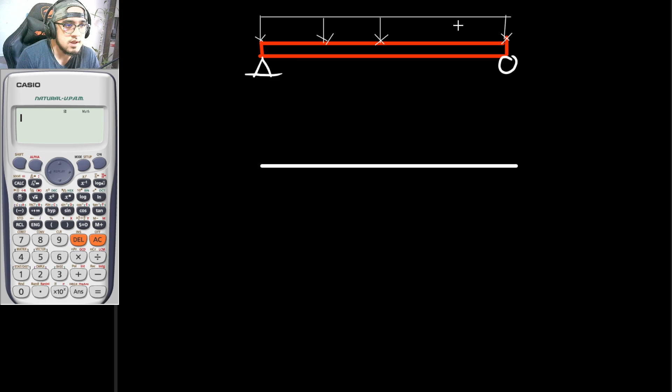So once again, meron tayong moment, and let's say beam nga ulit siya. Let's say we have another beam, simply supported. Let's move this whole thing. So this is your beam, simply supported, and let's say this is to be it. For its shear diagram, dapat i-subject muna natin siya ng load. So let's say this is its load, a uniformly distributed load.

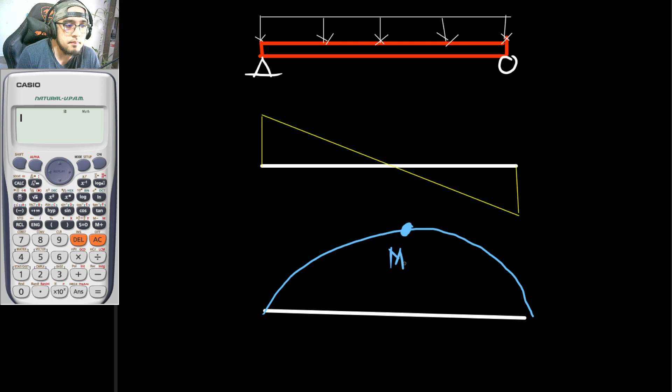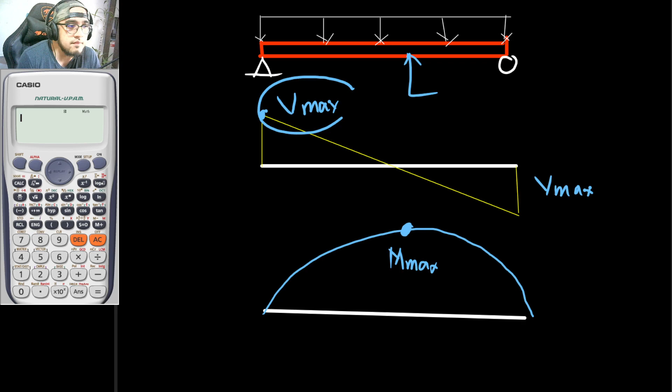And for its shear diagram, it would be looking like this. And for its moment diagram, it would be looking like this, approximately. So meaning, if this is your maximum moment and this is your shear maximum or Vmax, it means your structural member should be stronger than your Vmax and should also be stronger than your Mmax.

So that's the very basic design philosophy common to all our structural engineering subjects, just like Principles of Steel Design, Reinforced Concrete Design, and even Timber Design. So that's really the main idea or the main philosophy.

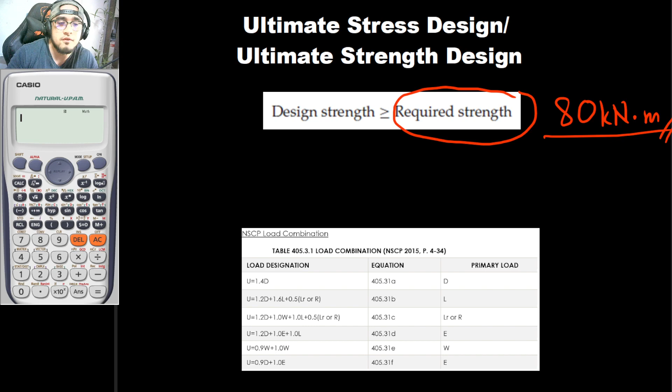Okay, and also, from the previous meeting we discussed the various uncertainties in the design of reinforced concrete, like the uncertainty of the members and the uncertainty of the magnitude of the loads. So for example, we have a required strength. Let's say we anticipated 80 kilonewton meters, but in actuality, sa totoong buhay, naging 84 kilonewton meters yan.

Though it is not that much, it just increased by 4 kilonewton meter. But if you designed your member to withstand just this, it means if this is to be your load, your member will now fail. So that is one uncertainty.

And that is to be the uncertainty in the load. Another uncertainty is that maybe during the construction of your reinforced concrete, there will be imperfections in the construction procedure that will reduce the strength of the members.

So for example, let's say the design strength is 155 kilonewton meters. This is just for your design strength. But when you were constructing it, there were some imperfections in building it, so let's say the actual strength was reduced to 130 kilonewton meter. This is just for pretend. So once again, we would be having various uncertainties.

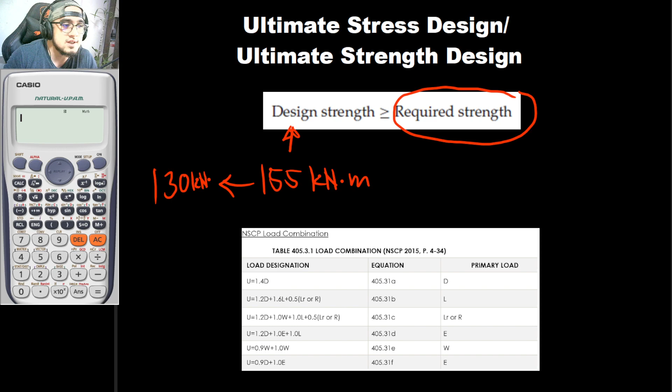And for us to address those uncertainties, we will now be applying factors of safety. We will place our factors of safety to address the issue of uncertainty.

So for your required strength, we will now be applying factors in our load combinations. Once again, our load combination will be as follows. So these are to be our load combination.

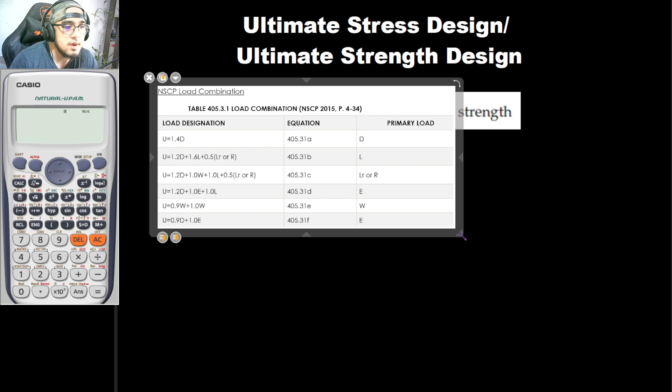Confirmation, everyone. Are these factors readable? 1.4D, can you read it? 1.2D plus 1.6L, can you read it? Are these readable, guys? Yes, sir. Okay, so very good.

So once again, for us to address the issue on the required strength, we will be increasing the loads itself. So if your primary load is to be a dead load, you will be increasing this, so 1.4 dead load. Then if you would be having your wind loads and let's say your earthquake loads, they are to be as follows. And the thing here is that if you have all of these loads, what you will be doing is solving for all of them.

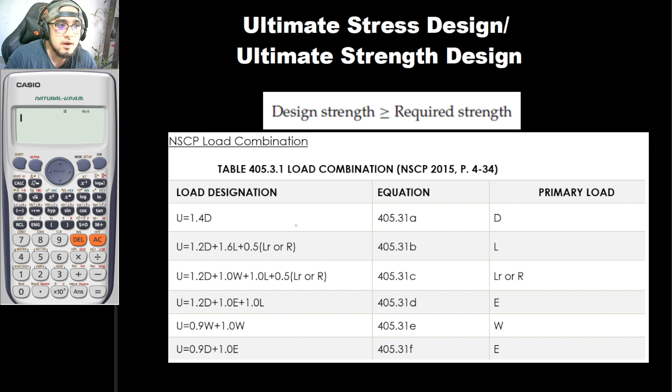So you will be solving for all of them. Then after solving for all of them, you will now be choosing the largest magnitude or the biggest load. And the biggest load is to be the one that is critical. So the biggest load is to be our basis for our design. So that is for our required strength.

So once again, that is to be our way on how we would be addressing the uncertainty of the required strength. But how about for the design strength?

For us to address the design strength, we will be reducing the strength of the material itself. So for example, 150 kilonewton meter is the strength of our structural member. What we will do is reduce it, let's say up until 135 kilonewton meters, so that if this is what we designed, maybe our required strength will slightly exceed this, like 136. If this is what we used, in actuality this will be its actual strength. But we reduce it so that we are safer.

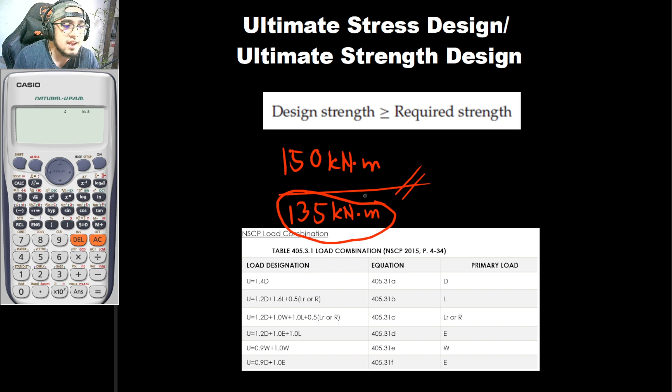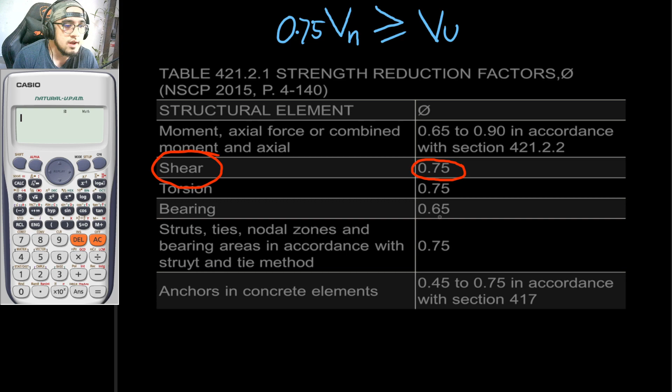So if we are to reduce our design strength, we will now be multiplying it by our reduction factor, given by the symbol phi. Your symbol phi is given by the following: it can either be this one right here if you are designing it in moment or axial force or combined moment and axial, which will range from 0.65 up until 0.9. And if you are designing it in shear, you will be using the reduction factor of 75%, or 0.75, and others.

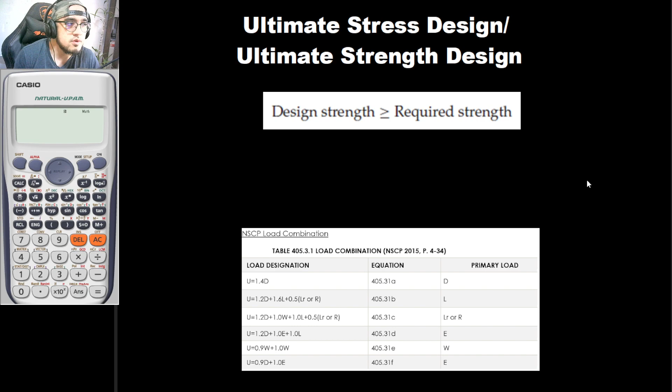So with that, if you are designing a flexural member, when it's moment, your equation will now be equal to phi, the reduction factor, times the nominal strength of your member. When we say nominal, this is the true computed value of the strength of your material. And this should be greater than or equal to whatever load combination you will be computing.

So with that, guys, this is now M sub U, your ultimate moment. So now the question is, for the required strength, how do we know this required strength? That is to be our main concern for today's meeting. So for the magnitude of the required strength, we can solve for this using any method from theory of structures or statics of rigid bodies.

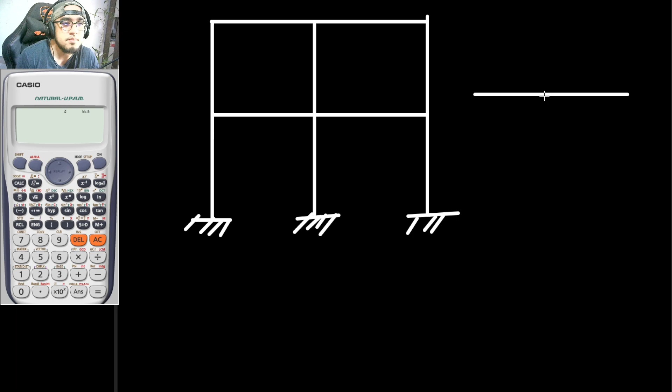For example, let's say we have a certain frame, like this one. Once again, this is just an example. Or let's say we have a certain simply supported beam, or maybe a continuous beam. This one right here could be fixed, then let's say we have a pin support here, and a roller support here, and another roller support here. This is just an example, guys.

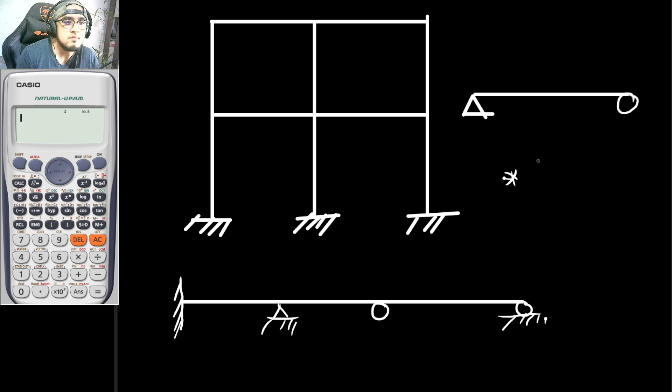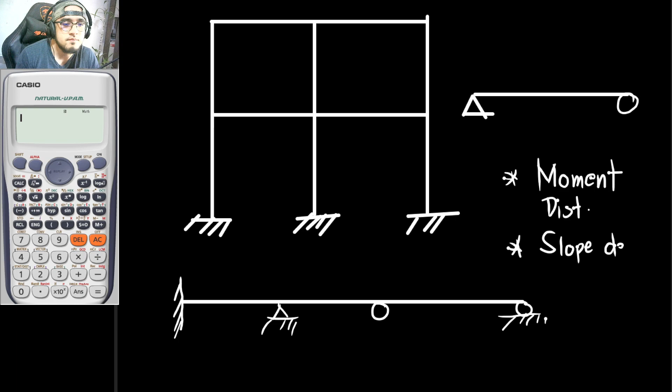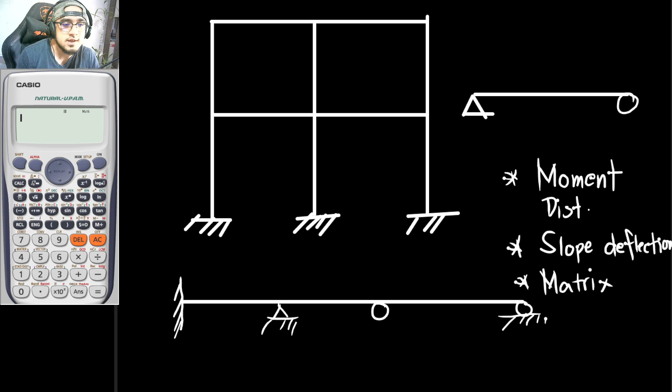So if we have these structures, we can solve for its moment, shear and moment diagram to get its maximum value by using any of the following: moment distribution method, or maybe slope deflection method, or maybe matrices. You should already be familiar with these. They pretty much give the same results.

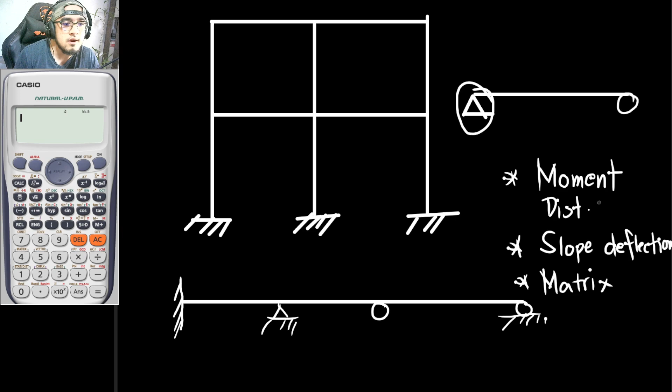For your simply supported beam, since this is determinate, you can solve for its maximum shear and maximum moment using statics of rigid bodies, wherein you would just solve for the reaction then draw its shear moment diagram. If you have an indeterminate structure like your frame, or this continuous beam, you will be using moment distribution, slope deflection, or matrix. It is not limited to these procedures, so if you know other procedures, that's fine too.

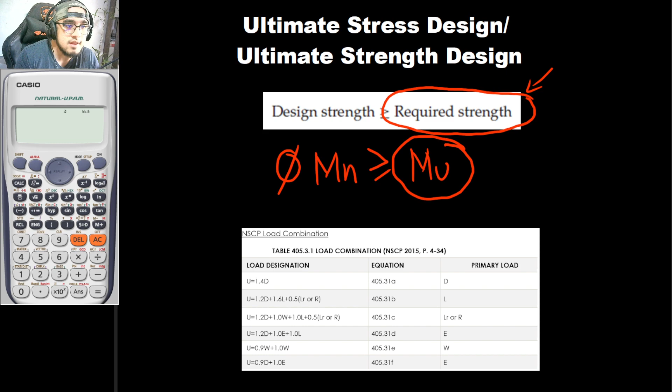So that's where our debate ends. The short answer, in reinforced concrete, is yes, we can solve for the required strength without going through these methods, if certain conditions are satisfied. From NSCP 406.5, we have a simplified method of analysis for non-prestressed continuous beams and one-way slabs. We can actually use this method to determine the required strength if all of these conditions are satisfied. The first condition is that your members should be prismatic.

So what does that mean? These are the conditions. It is said that the members should be prismatic, meaning that for a certain structural member, its cross-section at one end should be the same cross-section throughout. For example, we have a certain beam, and let's say the cross-section at this part is rectangular, let's say 250 by 400, just for example. This section should be constant throughout, so in all sections, it should be 250 by 400. That is what we mean by prismatic.

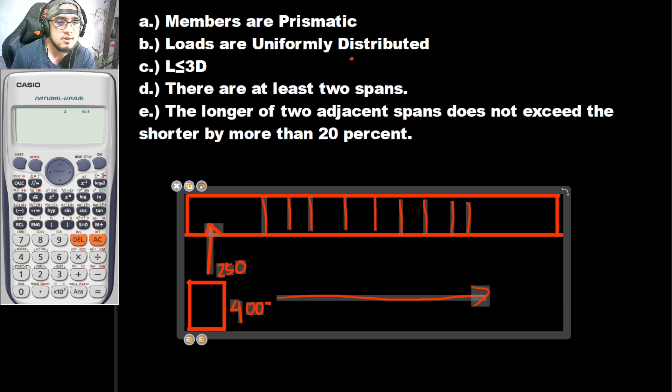And if your structure would look like this, for example, this is again your beam. We have a section here and it increases, so it gets a bit bigger. Let's say that at this part, the section is again 250 by 400.

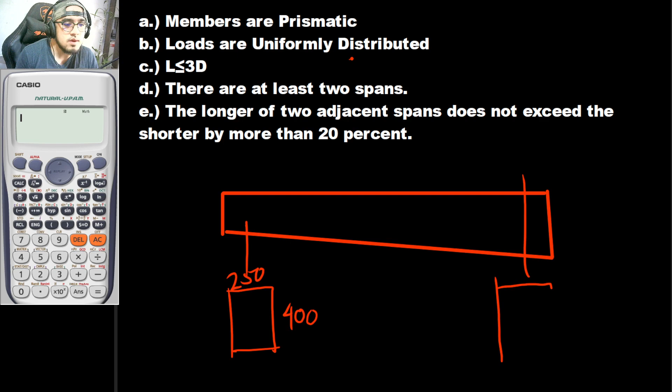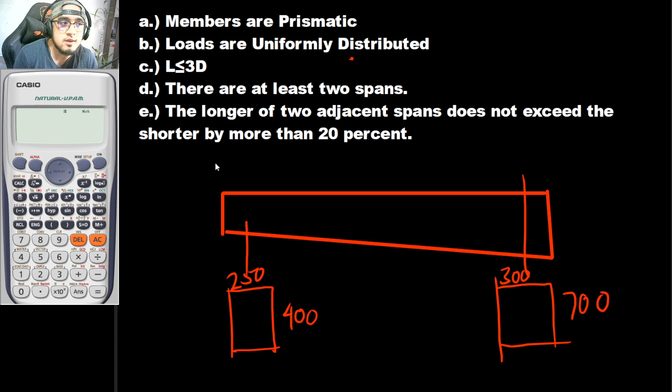Let's say at this section right here, let's say that this is now to be 300 by 700. So in this case it is not prismatic any longer, so with such, we cannot use the simplified method. So let me delete this again.

So for the second condition, the loads should be uniformly distributed. So if this is once again to be your beam, your loads should be uniformly distributed, so this is what it should look like. That's our uniform distribution. You are already accustomed with this, guys.

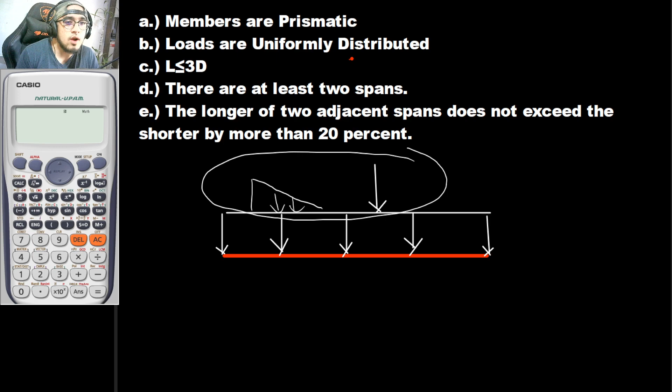So what if there is to be a certain point load here, or let's say that we would be having a certain trapezoidal load here? If we would be having these two right here, or any of these two, it means that we cannot use this method any longer. So once again, the main requirement is that the loads should be uniformly distributed.

So the next condition is that your live load should be less than or equal to 3 times your dead load. Self-explanatory, so our live load should be smaller than or equal to 3 times the dead load. That is another condition.

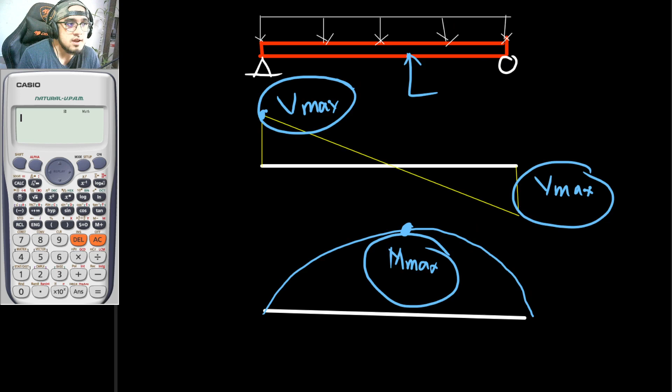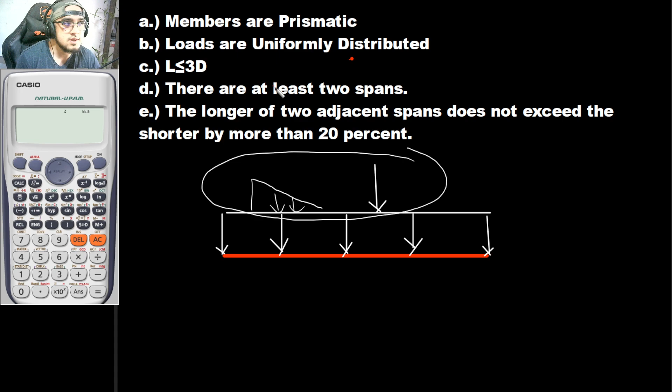And another thing, the last condition that we must satisfy is that the longer of the 2 adjacent spans does not exceed the shorter by more than 20%. So I will be drawing once again, for a while.

Okay, so let's draw once again. Suppose that this is to be your beam, and let's say that this is to be your support here, and this is to be your support here. So as you can see, we have 3 spans: span number 1, span number 2, and span number 3. So it is said here that if this is to be your length number 1, this is to be your length number 2, and this is to be your length number 3, it means that, for example, your length number 1 and length number 2...

If you would be comparing them, let's say that your L1 is shorter, it should not be shorter than L2 by 20%, and the other way around. So the same goes for L2 and L3. So their dimensions, their lengths, should not differ by more than 20%. But there's no relation between L1 and L3, there's no concern there, only adjacent spans matter. So those are to be the conditions that must be met if we are to use this simplified method.

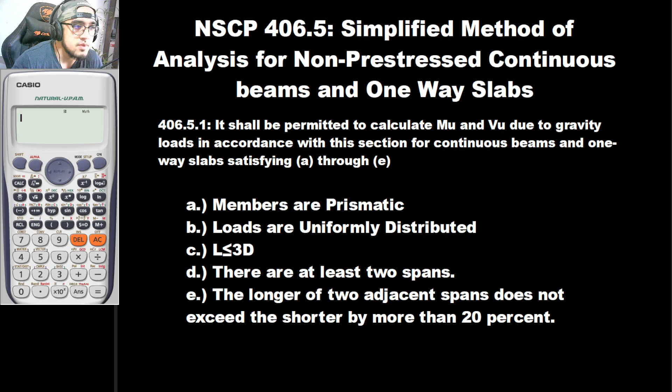So the usage of the simplified method is quite simple, thus 'simplified,' no pun intended. Its usage is really simple. And in using this method, it's very simple to the point that we'll just use formulas, direct substitution. So this is very easy as long as you understand these conditions right here.

Let me explain first what each of these terms mean here, so that when you solve, for example in your laboratory subject, you'll know how. Okay, so let's say that we would be having this setup.

I have pre-drawn already so that we're not delayed. So this one is to be your column, so the vertical members are to be your columns, I should say, since it's plural, and your horizontal members here are to be your beams. So guys, can you imagine it? Columns and beams, confirmation, did you understand our setup?

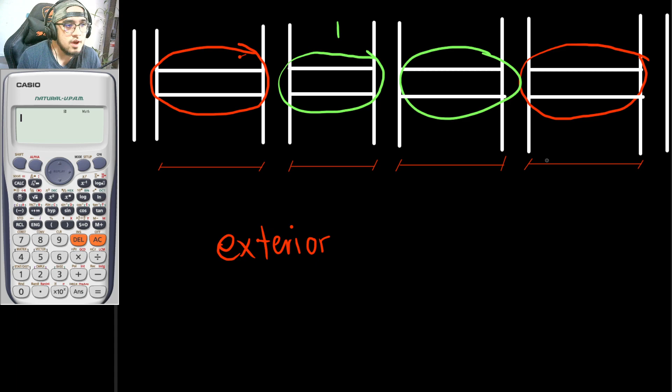So there, okay, so let's fill this up first. So of course, guys, if you would be drawing its moment diagrams, it would look like this. So this is not drawn into scale. Approximate lang to, guys.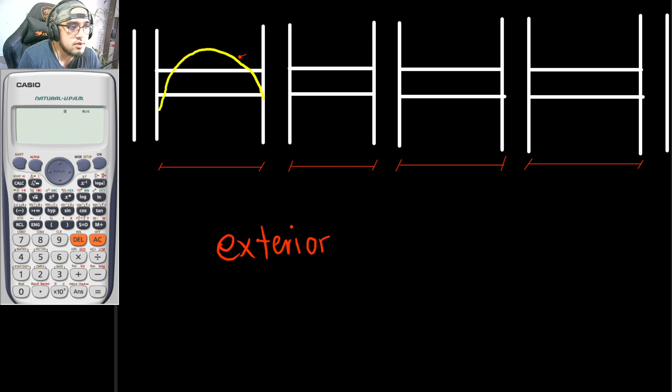Oops, sorry, hirap naman mag-drawing. So this is to be its approximate moment diagram, as well as for this, as well as for this, as well as for this. So guys, once again, these are to be the approximate moment diagrams.

Okay, so going back here, so for the positive moments, ito yung mga positive moments natin, guys. So it would be at the top. Okay, so it is said here that for the end span, the positive moment would be this one or this one. So paano ba tayo mamimili?

So itong una, this indicates that the discontinuous end is to be integral with support. And this one right here states that the discontinuous end is to be unrestrained. And as you can see in our example here, yung dalawang discontinuous end natin - by the way, guys, this is to be your discontinuous end kasi hindi na nga siya nag-continue, and these are to be your continuous. So once again, the one on your left, leftmost, that is to be your discontinuous. And the one on your rightmost, that is also your discontinuous kasi nga hindi na siya nag-continue.

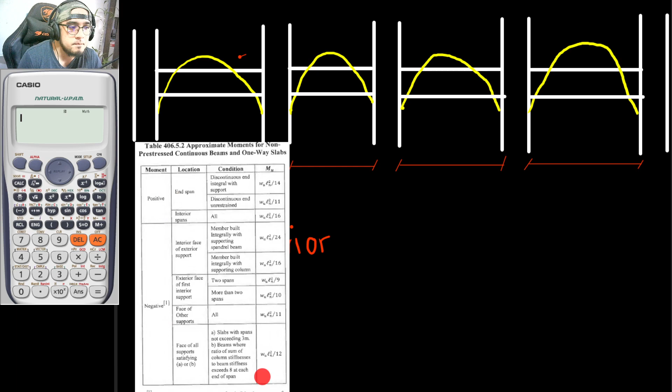And it is also said here that - teka, mas maganda ata i-copy-paste ko. So I will just be copying this here. Okay, so I will be decreasing its size. Guys, can I get a confirmation if it is to be this small? Nababasa pa ba? Ito hindi na. Hindi na, sir, hindi na. Okay sige, wag na lang natin isama yan para di tayo malito.

Anyway, so once again, if this is to be its condition, sabi dito, discontinuous end integral with support. So as you can see guys, yung discontinuous end natin has its support, so it is to be integrated. Meaning that the positive moment at that span is to be W ln squared over 14. So guys, ito keyword, key fraction. Teka, nasa yung pen? So ang positive moment dito is 1 over 14. So ganun din sa kabila, 1 over 14. It is because that it satisfies this condition.

However, if it would satisfy this, sabi dito, discontinuous end unrestrained. So what that means is that, for example, wala kang column dito. So for example, ganyan lang yung setup natin, and its moment diagram would now look like this. So magiging ganito yung moment diagram niya, no? Straight line pala to, so ito yung moment diagram niya. The positive moment here is to be W ln squared over 11. So ang fraction niya is 1 over 11, yung coefficient niya. But once again, since our structure is to be restrained in both ends - teka, di ko ma-delete.

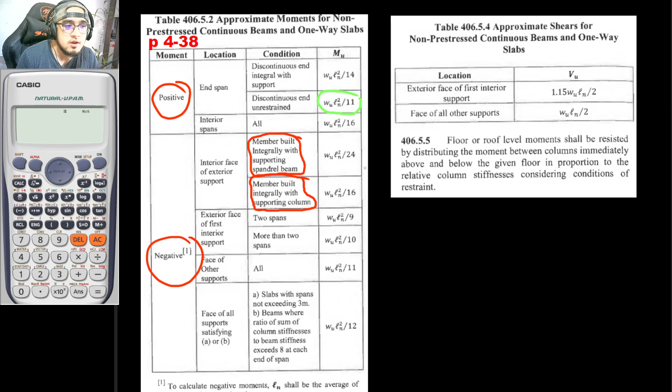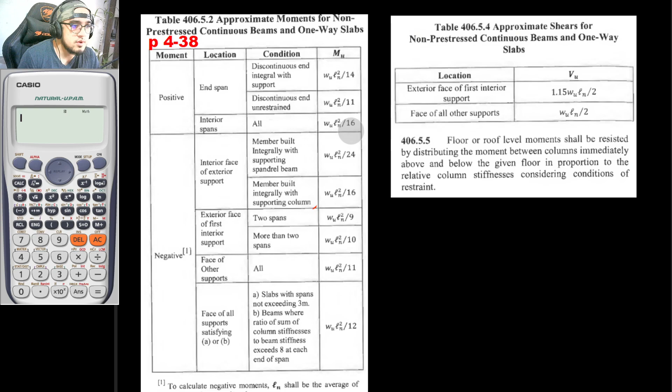Sir, hindi. So this one right here kasi, 16 nakalagay dito. Teka. So blakihan natin, no? Okay, so I would just be increasing this. So by the way guys, this table right here is to be in page 4-38 of your NSCP.

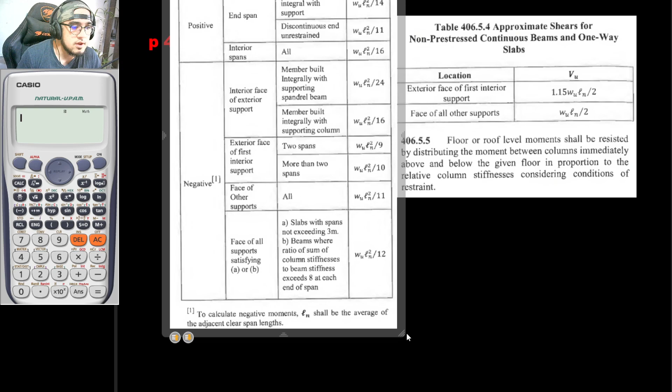So I will just be increasing this for a moment, para mas kita. How about, oops, sorry. How about now, guys? Is it now readable?

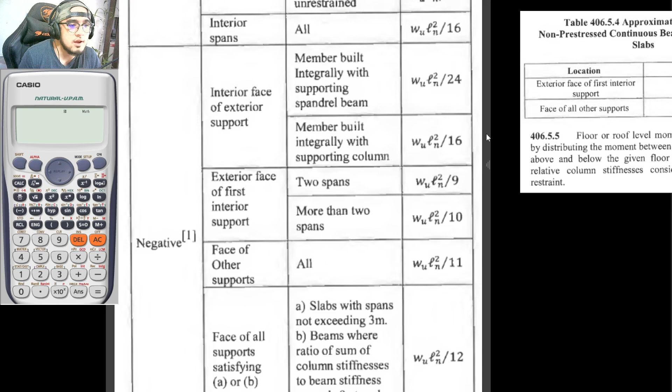Yes, sir. So eto, nandito kasi tayo kanina guys. So member built integrally with supporting column. And as you can see, yung supports natin are columns. So thus, we will be using 1 over 16.

So ito. Teka, nasa na naman yun? So ito, 1, oops, gawin ko na lang green para mas ma-differentiate. So yellow pala. 1 over 16 and 1 over 16. So these are to be for the interior face of the exterior support, which is to be this. Okay, next, going from cell to cell once again.

How about for the exterior face of first interior support? So our interior supports would be this one, and this one. So self-explanatory, when we say interior support, those would be the supports that are interior. Paano ba ibang sabihin? Basta yung nasa loob.

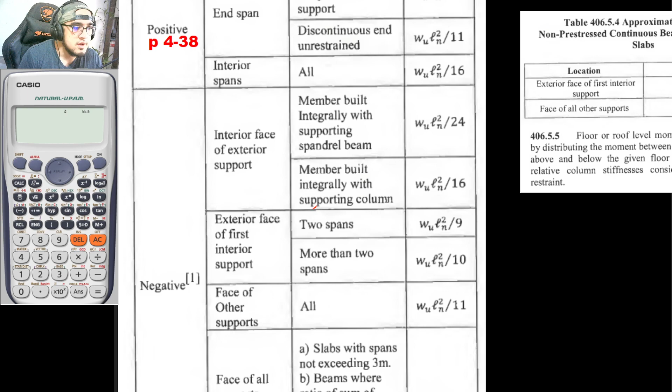And according to this, exterior face of first interior supports, so the first interior supports are to be this one and this one. So mga manggagaling sa labas papunta sa loob, yun yung ating mga first interior support.

So from that, if we have two spans, we will be using 1 over 9. But if we have more than two spans, we will be using 1 over 10, divided by 10. And as you can see in our example, we have 4 spans, so 1, 2, 3, and 4. With such guys, we will now be using 1 over 10. Okay, so writing them here, this is now to be 1 over 10.

So once again guys, exterior face pala to, no? So if this is to be your first interior column, this is to be your interior face, and this side is to be your exterior face. And if this is to be your first interior column, once again, the one on your right, this face is to be your exterior face, and this face is to be your interior face. Self-explanatory. Interior, loob, exterior, labas.

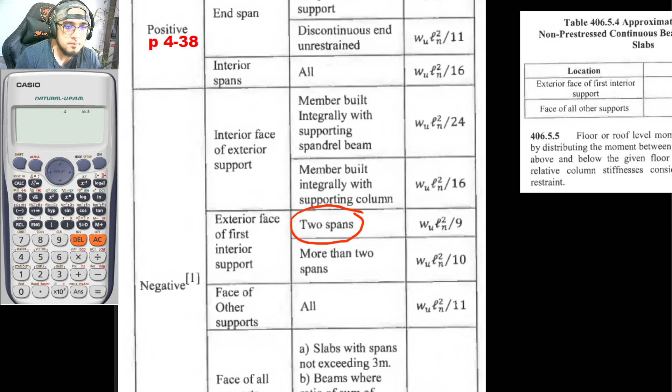Okay, so once again, with such, this is to be 1 over 10. So these are to be the coefficients, no? Okay, so next, ito pa. So for the face of all other supports, erase natin.

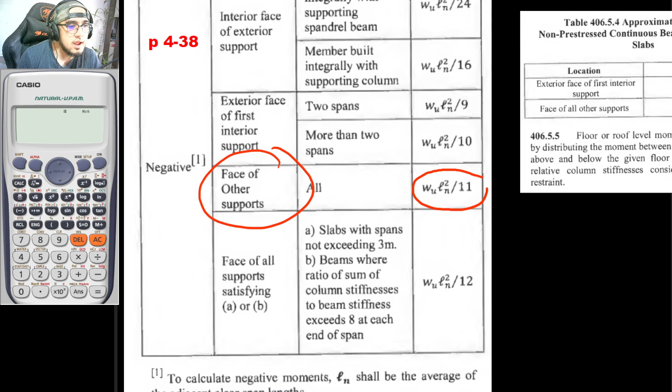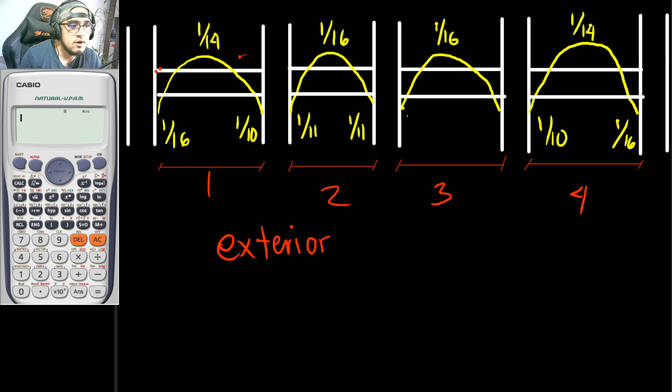Okay, so for the face of all other supports, those are to be WLN squared over 11, thus 1 over 11. So with such, guys, this is now to be equal to 1 over 11, 1 over 11, and 1 over 11. And as you can see, we already have completed our coefficients.

So ngayon, paano ba tayo magsasolve? Once again, we need the values of our W and our LN. Palitin ko lang ulit, ito nga kasi yung general formula, no?

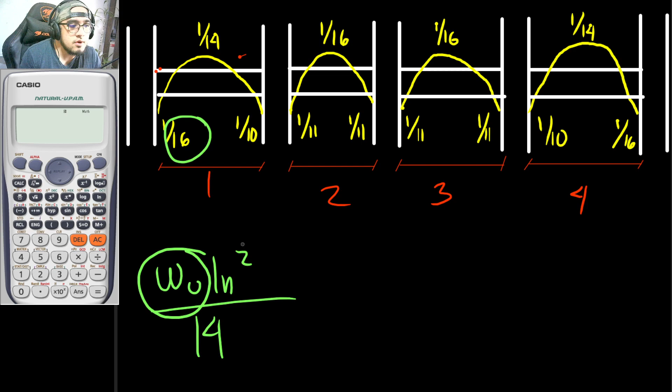WU times LN squared divided by these coefficients. For example, you would be solving for the positive moment here divided by 14 and etc. Pero ano ba yung WU? So your WU is to be your uniformly distributed load once again.

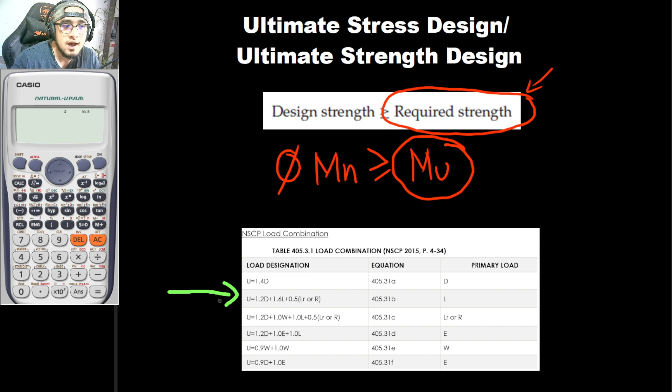Kunwari ang gusto mong isolve is WD, so yung uniformly distributed load ng dead load. Kung WL, uniformly distributed load ng live load. Kung roof live load, WRL, and etc. But if you want to solve for this one directly, kung yung factored moment na agad, factored load na agad yung gagamitin mo, WU yung gagamitin mo. So, okay, anyway, those are to be for your factored moments.

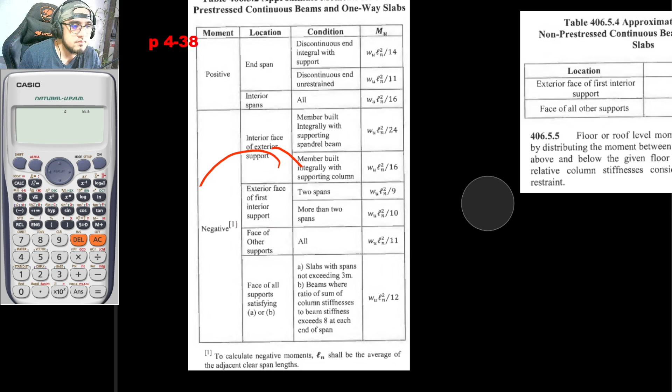And as for your LN, according to this bottom part - teka, lakihan ulit natin para mabasa nyo. So for your bottom part, though hindi sinabi dito, but for your positive moments, kasi ang sabi dito, to calculate negative moments, LN shall be the average of the adjacent clear span lengths.

Pero sa positive moment, though hindi naka-indicate dito, explain ko na lang, that if you are to solve for the positive moments here, the LN that we will be using are to be the span length. So, ganun lang kasimple. Teka, dito. So LN1, LN2, LN3, and LN4.

So, for example, that you are solving for the positive moment here, M max na positive, for example. This is now to be equal to 1 over 14 dito. W times LN4, since this is to be its span, squared divided by 14. So, direct substitution, kung ano yung may solve nyo dyan, that is to be your M max or MU already. So that is to be your MU already, and this is to be the required strength of your structure already.

So yan. And if you would be solving for LN3 or this one right here, you would be using this LN. So kung nasa anong span siya, yun yung gagamitin mo. So with such, eto LN3 na siya. Okay, but ayun na, ganun lang kasimple yung sa positive moment.

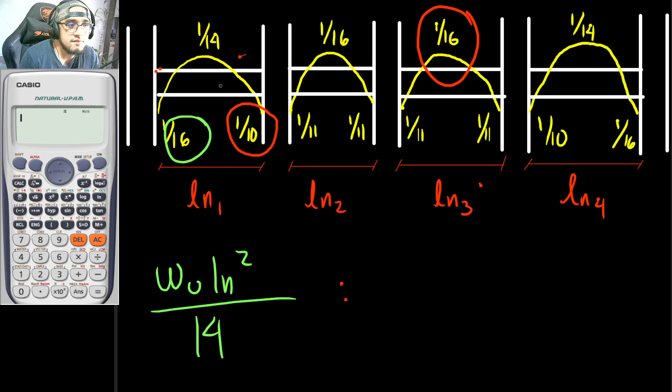So, for the LN that we will be using, it should be the average of the two adjacent lengths. So, if this is to be the moment that you are solving, you will be getting the average of both of this, LN1 plus LN2 divided by 2, yun yung gagamitin mo para dito. However, for your exterior faces, so in this part right here, wala naman siyang katabi, no? Meaning, ito na yung gagamitin mo. And the one on your right, if this is to be the moment that you will be solving, ito na din lang yung length mo kasi wala naman siyang katabi.

However, if you would be solving for the other faces like this one, for example, ito yung isosolve mo guys, nasa gitna yung 1 over 11. The LN that you will be using is to be the average of this and this, so kung ano yung magkatabi. And if you are solving for this, the LN that you will be using is to be the average of both of this, or of course, the adjacent lengths, yung adjacent sides nila. So, let's say that we will be solving for the negative moment at this part.

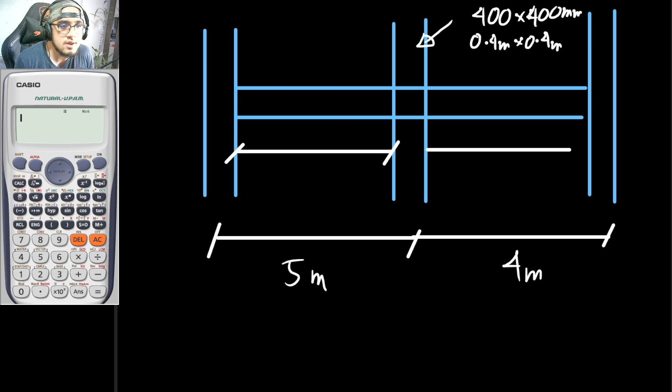So ito kasi center to center, pero ito lang dapat yung kinoconsider natin sa mga beams natin. And those are to be the clear span. And with such, if the half of this column is to be 0.2, and the half of this column is to be 0.2, kasi nga 0.4 yung kalabasan niya. So, looking at the calculator to your left, so 5 meters minus 0.2 minus 0.2, kasi nga dalawang side, that is to be 4.6. So, thus, this is to be 4.6 meters. And as for this one, so 4 meters minus half of this column, which is 0.2, minus half of this column, which is 0.2. Thus, so 4 minus 0.2 minus 0.2, that is now to be 3.6 meters.

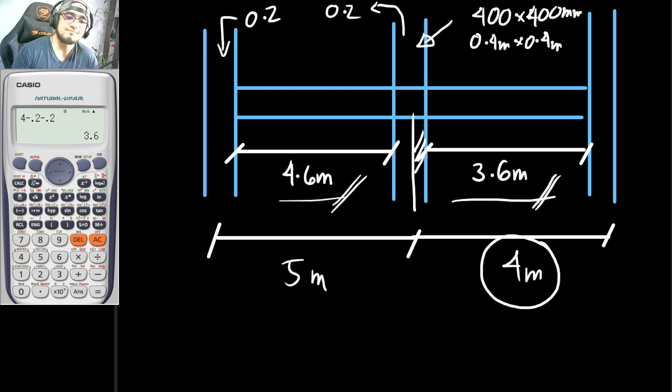So guys, understood? Clear span dapat, hindi center to center spacing. Understood, guys? Yes, sir. Okay, very good. Okay, so once again, that is to be for your ln. So ln and for your moment.

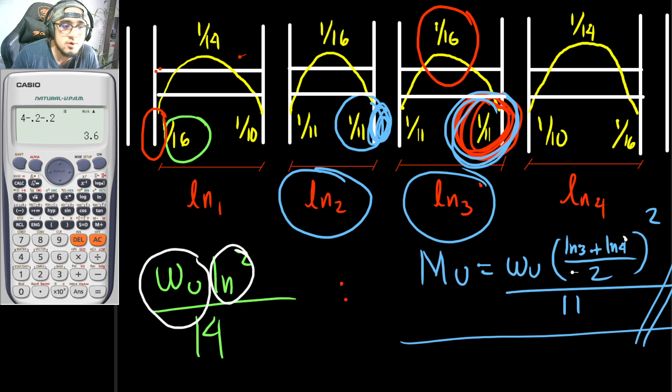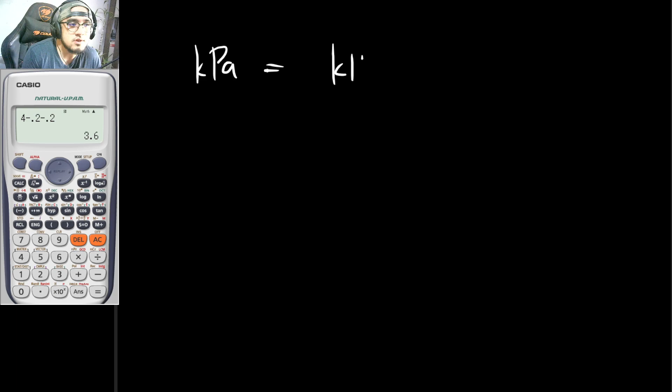But what about for your W? So how can you solve for the uniformly distributed load? Because if you would be looking at your NSCP, or the National Structural Code of the Philippines, the loads there are to be given in kilopascal. So naka-kilopascal kasi yung mga loads na nandun. So kilopascal. And this is to be a pressure. And kilopascal is to be kilonewtons per square meter.

So ito yung load ng pressure natin na nasa NSCP. But for your W, that should be kilonewtons per meter. So as you can see, there is to be an inconsistency in units. So this is to be in terms of area, and this is to be in terms of linear measurement, which is in meters. So paano ba natin maiko-convert itong kilopascal natin para magamit natin as W dito sa equation na ito? So sa mga equations na nandito.

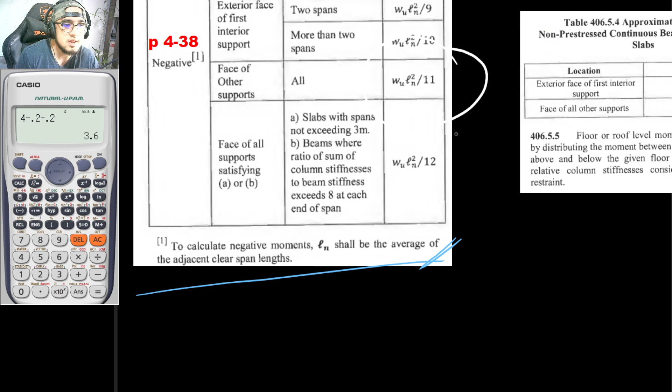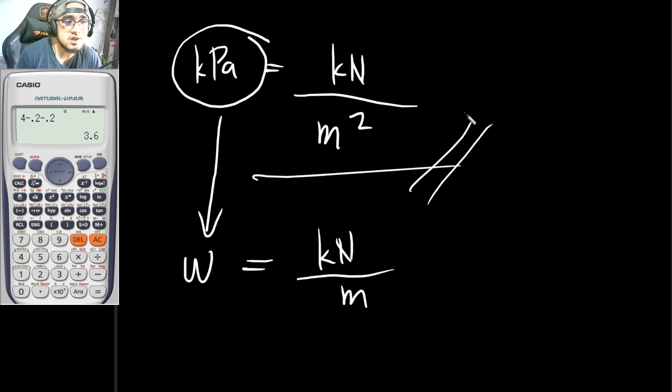So for us to convert your uniformly distributed load, your pressure load, into a uniformly distributed linear load, what we will be doing is multiplying it by the tributary width. So what is our tributary width?

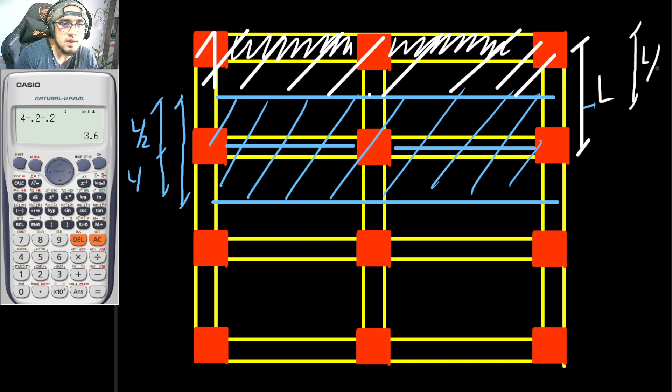And to convert our pressure into a uniformly distributed load, we will just multiply this by our tributary width. The tributary width is in meters, so the meters will cancel out, and it becomes kilonewton per meter.

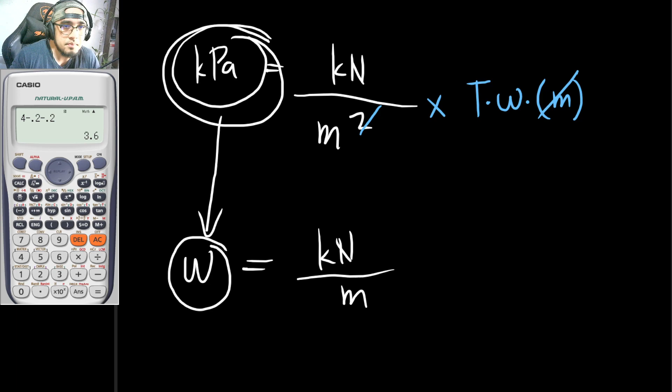We will have an example next meeting for you to understand it better. So that's it, but we have a catch once again.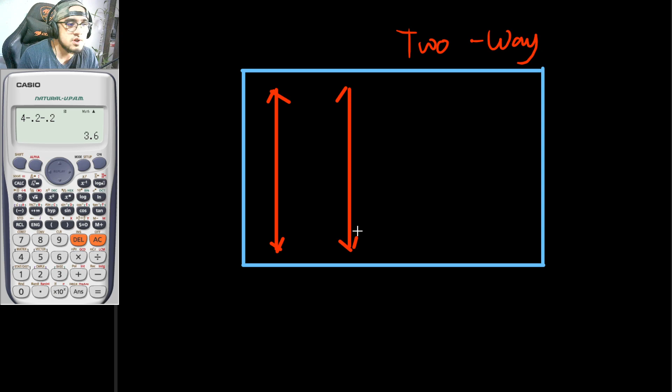So once again, for your one-way slab, it's only one side. It goes only in the direction of the short direction. So it would be this.

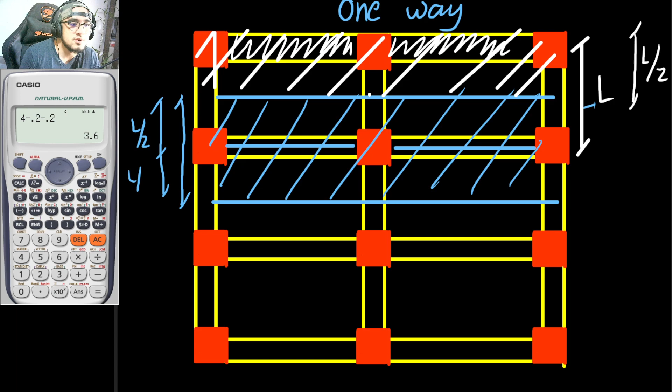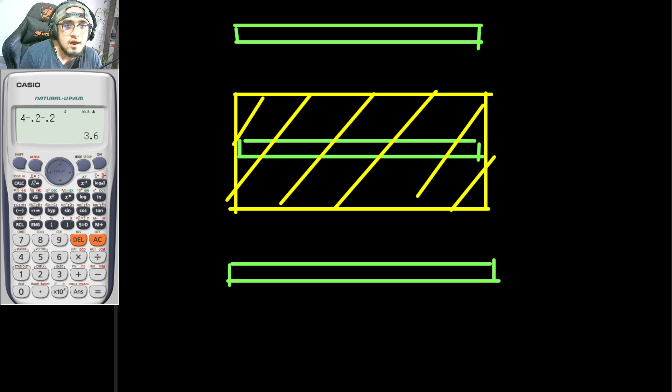We have a beam here, and this is a plan view. When we talk about tributary area, it is the area that your structure is to be carrying, or the area of responsibility. So for this beam, the tributary area is this. It means that beam will carry every load located in that area. For example, if you are standing there, assume that this beam is the one carrying you, not the other one. So that's it. For your tributary area, that is basically your length times your tributary width.

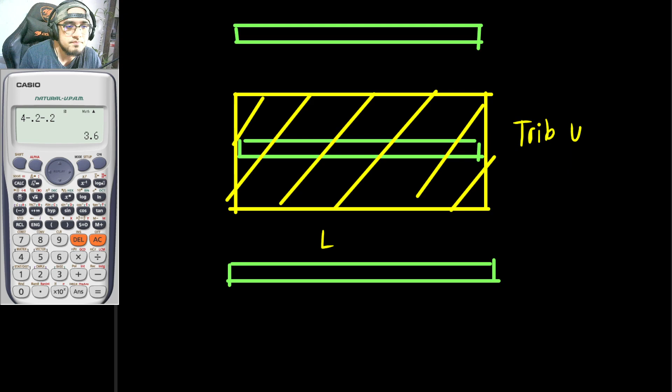For your tributary width, that is given by this. Let's go to the left side. This is the middle, so just get its length, or half of the length here. Let's pretend this is L1, the whole upper span, and L2 is the whole lower span. This is their spacing. So this is L1 divided by 2, and this is L2 divided by 2, or just half of the span.

Did you guys understand? Mr. Ebreo, understood or not? Yes sir, okay very good. How about Anthea, did you understand? Yes sir. Okay very good. Carl, Eliezer, did you understand this? Carl, are you there? Wala. Okay so it seems he's not there. How about Joanna? Yes po, so did you understand our idea of tributary area? Joanna? Yes po, sir. Okay very good. Chandni, did you understand our lesson for today? Yes sir. Okay so very good.

Before I end our meeting for today, guys, are there any questions about anything discussed today? Okay, countdown ako, five. Okay, Mr. Choi. Sir, regarding determining if it's a one-way slab or two-way slab, what determines which one to use?

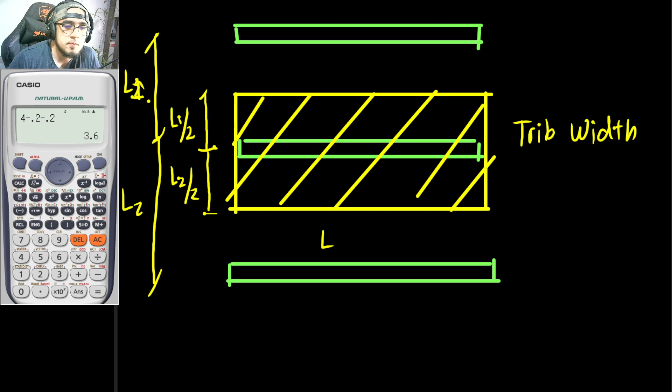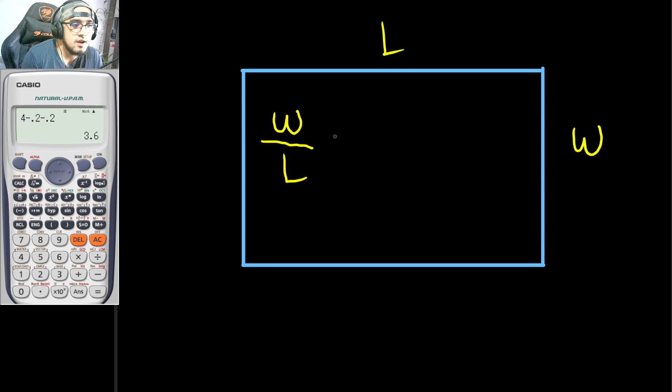Okay, let's go back here. Let me delete this first. For example, you still don't know if this is to be a two-way slab or one-way slab, and this slab has its own dimensions, length and width, so it has two dimensions. Now you will get the ratio of it, the smaller side divided by the larger side, so W over L. Get the answer and compare if it is less than or equal to 0.5.

If it is less than or equal to 0.5, it is a one-way slab. And if it is greater than 0.5, it becomes a two-way slab.

So for example, let's check using our calculator. We have a slab where W is 5 meters, and one side is, let's say, 7 meters. So 5 over 7 equals 0.71. Since it is greater than 0.5, it is a two-way slab. But let's say if we have a width of 5 meters and the length is, for example, 12 meters, 5 over 12, check the answer, it is 0.416. So with that, it is less than 0.5, making it a one-way slab.